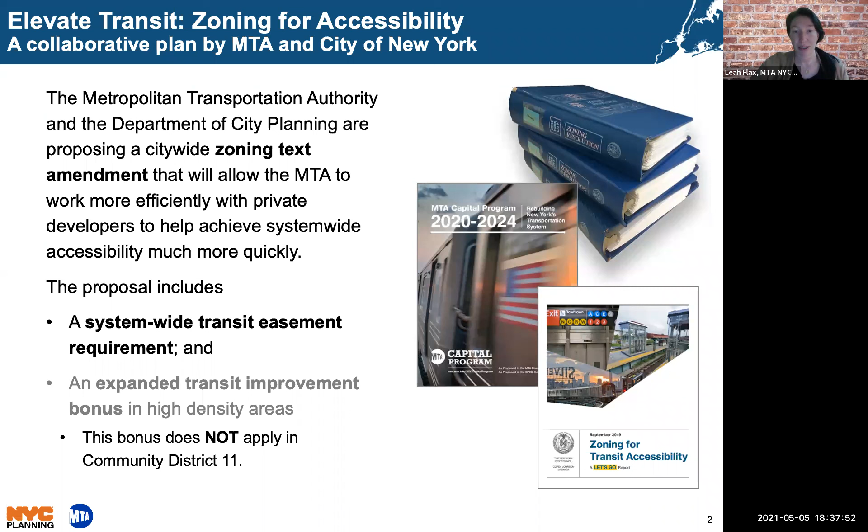So where are we right now with accessibility? Most of our subway stations were built before 1950 and didn't include accessibility. We've been making progress through our capital programs, but we still have a long way to go. Of our 493 subway and Staten Island Railway stations, 136, or about 28%, are currently accessible. And of the Long Island Railroad and Metro North stations within the 5 boroughs, 25 of 39 are accessible. When I say accessible, that can include many features to make stations accessible to and usable by individuals with disabilities. This text amendment really focuses on vertical accessibility.

We think that this text amendment can help a lot, but we've also made a historic commitment through our 2020-2024 capital program to increase accessibility. In that program, we are dedicated to making 77 more stations accessible. Once those are completed, 43% of transit stations versus the current 28% will be accessible. That represents about 60% of where our riders are, with the goal for no rider to be more than 2 stations away from an accessible station. We are absolutely committed to doing that, but this text amendment can help us move even more quickly.

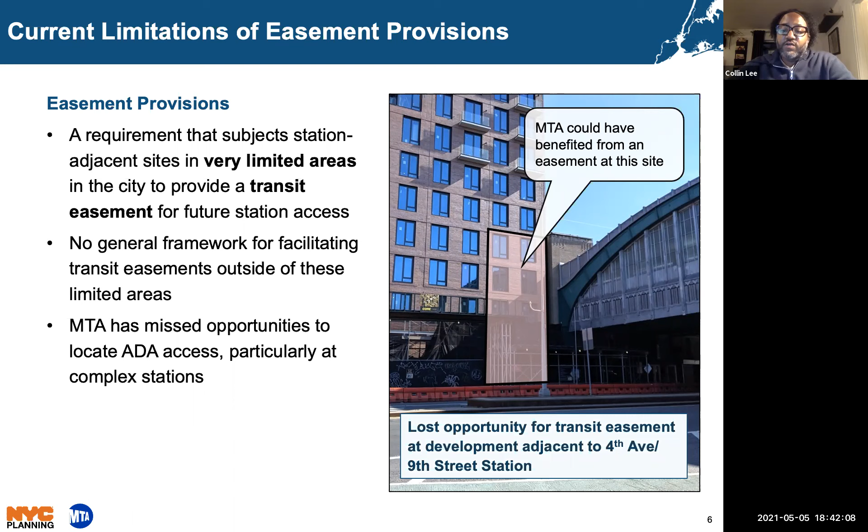However, in the zoning resolution today, these provisions have very limited coverage, and they only apply in certain areas of the city, such as along 2nd Avenue for the 2nd Avenue Subway line, and the most recent Special Inwood District. Also, the zoning resolution does not currently provide a consistent citywide approach for facilitating transit easements on development sites around transit stations. As a result of these limitations, there have been missed opportunities for the MTA to locate ADA access at optimal locations on development sites next to the station.

And to address some of these limitations of these zoning provisions, we are proposing zoning for accessibility. This proposal seeks to create more opportunities for accessibility throughout the transit system through the zoning tools available to us. One of the components of this proposal is a citywide easement requirement that will address some of these limitations.

As part of this requirement, all developments and enlargements on zoning lots within 50 feet of mass transit stations, and in applicable zoning districts, would need to file an application with the MTA and the City Planning Chairperson to determine whether an easement on a zoning lot is needed to help facilitate station access improvements in the future.

Applicable districts include residential districts that support multifamily buildings, which are generally more compatible with transit station entrances and other transit-related uses. These districts also include R5 commercial districts with a commercial overlay, R5D districts, and districts with higher density levels as well. Also, medium and high density commercial and all manufacturing districts would also be subject to this requirement, as development in some of these districts are more easily able to accommodate station entrances.

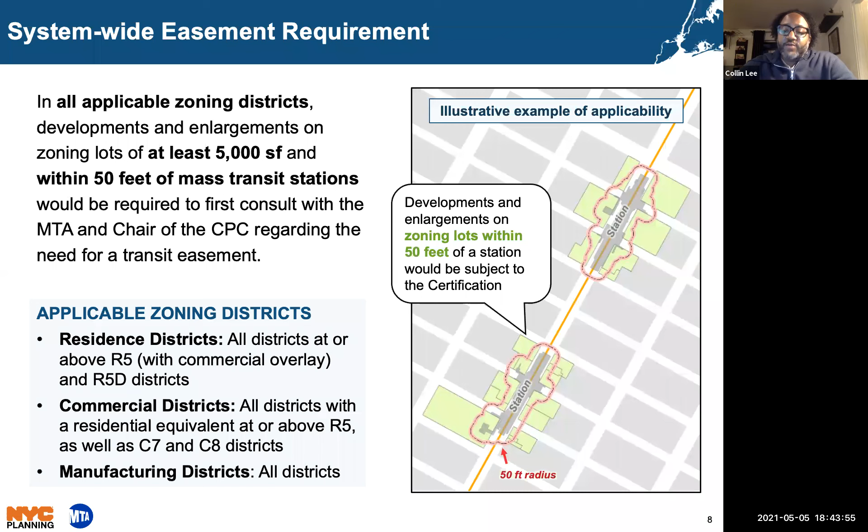While the process of obtaining a certification will be required for most sites within 50 feet of a transit station, it is anticipated that the MTA will only ask for an easement in limited places that are most optimal for future transit access around each station.

In order to facilitate easement agreements in the future, targeted relief from certain zoning limits would be provided to minimize potential challenges for construction on a site subject to the proposed requirement.

So that means basically easement areas can affect development sites in a number of ways. The easement itself takes up floor area on a site and can reduce the available floor area for the development itself.

The shape and size of the easement can also occupy a large amount of space within a development's building envelope. This not only affects the direct area that is occupied by the easement, but it also has implications for construction feasibility around that area. Also, easements can restrict available space to provide for ground floor uses and parking spaces.

And depending on the type of development, it may create compatibility issues with more sensitive uses such as apartment units and other residential uses.

Without any zoning relief, easements can limit construction of a development to its full potential, and in certain situations can result in buildings that lack any relationship with the future use of the easement.

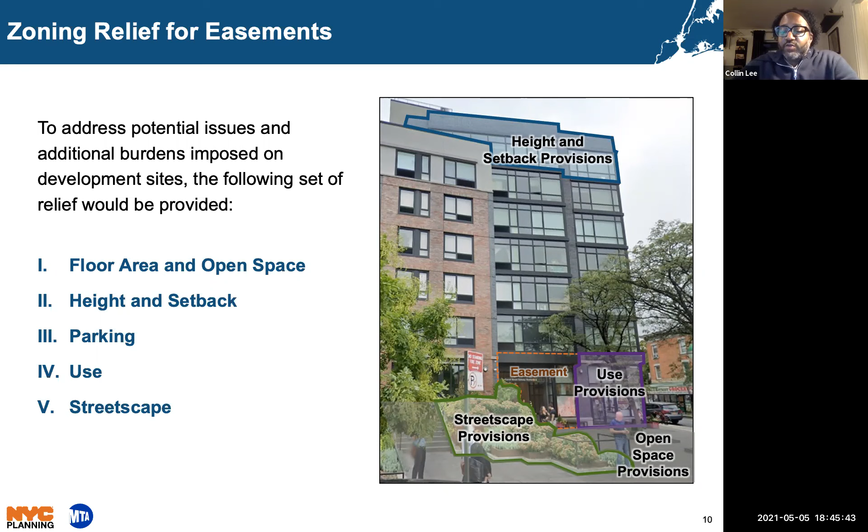If the provision of an easement makes it challenging for a development to be built, it would be much more difficult for the transit agency to acquire the easement.

And in conclusion, zoning for accessibility proposes a zoning text amendment to establish a framework for coordinating the siting and provision of the transit station improvements with new developments on adjacent sites.

As part of this framework, a required consultation process would apply to all developments and enlargements on zoning lots within 50 feet of mass transit stations and applicable zoning districts where easements are needed.

Targeted relief from certain zoning limits would be provided to such developments and enlargements in order to minimize potential challenges for construction on a site subject to the proposed requirement. Also, for sites that are below 5,000 square feet, or where conversions are proposed, the requirement would not apply.

Also, the provision of easements is voluntary on such sites, and where provided may also receive zoning relief as well. In addition to the proposed set of relief, further use, bulk, parking, loading, and streetscape modifications would be available pursuant to discretionary review and approval.

As we mentioned before, in addition to this new system-wide easement and framework, the text amendment would also include an expanded transit bonus mechanism, but this bonus mechanism would not apply in CD11 since there are no R9 and R10 zoning districts in CD11.

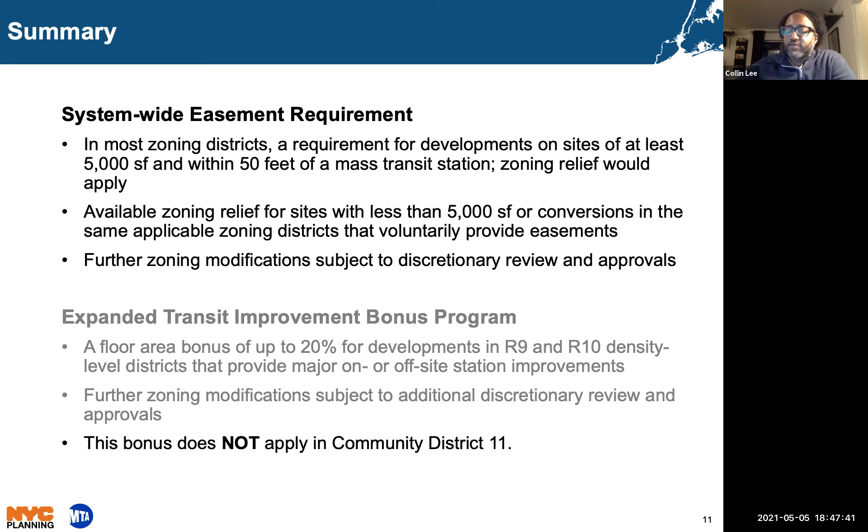The zoning for accessibility citywide text amendment has been referred out on April 5th of this year to all 59 community boards. It also went to borough boards and borough presidents, and they have 60 days to review.

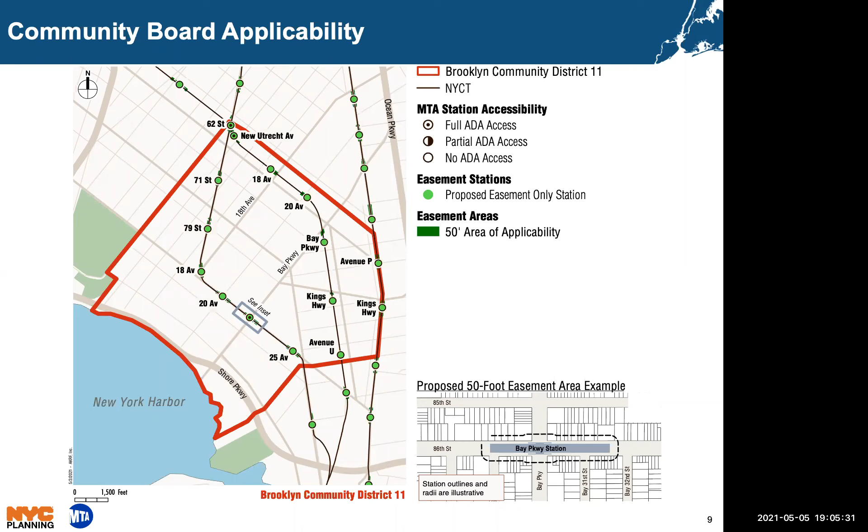So I'm assuming your question is, for that easement space, the displaced floor area, how high the allowance is to replace it in their building, right? Yes, correct. It is up to 20 feet, so up to 2 stories.

In most cases, we don't see that happening. Of course, there's the allowance for it, but the amount of floor area that would be displaced because of an easement likely would not fill 2 stories. Understood, thank you.

I have another question about when you're doing this - it will be decided by the MTA, but is it not a case by case where you can come back to us or to whichever community district to say, this is what our plan is, and this is a developer asking to build 6 stories high in front of, let's say, a landmark church. I'm thinking the old Dutch church or something. Is there something you can guarantee our district, that we have some input into what the MTA decides once we agree?

Because it's a really great thing that you're doing, I think this is wonderful. The disability - so many people need elevators - but at the same time, you don't want to take away from the neighborhood's characteristics, and we don't want to take away from people's sun and airspace. We still want to make sure it's done in a very considerate way. So that's all I'm asking.

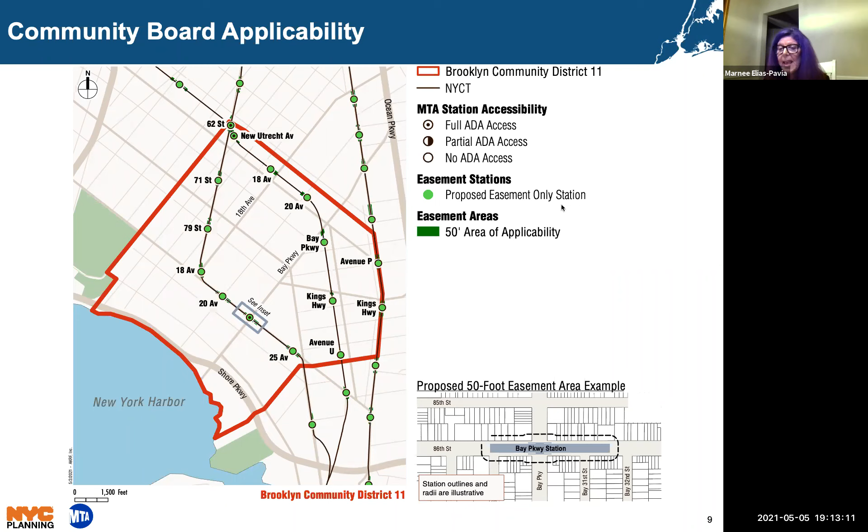I have a question - you mentioned that if a station is in the middle of the block, you would need an elevator for that. Is that correct? Potentially, it depends on the specific station, so I'm not saying there's no mid-block locations. My question is, are these elevators going to the platform or only to the station level? Within a given station, we might need one, two, three, or four elevators to make it accessible, because you have to be able to get to the station and to the platform. Some stations have a single middle platform, some have two separate bi-directional platforms, so it really depends on the location what we would need.

So, but the bottom line is the platform, the train platform will have ADA accessibility - is that correct? Yes, until you can get from the turnstiles up or down to the platform, it's not fully accessible. And how would this handle stations that only have direction in one way and you have to go to the other side of the street to get the other direction?

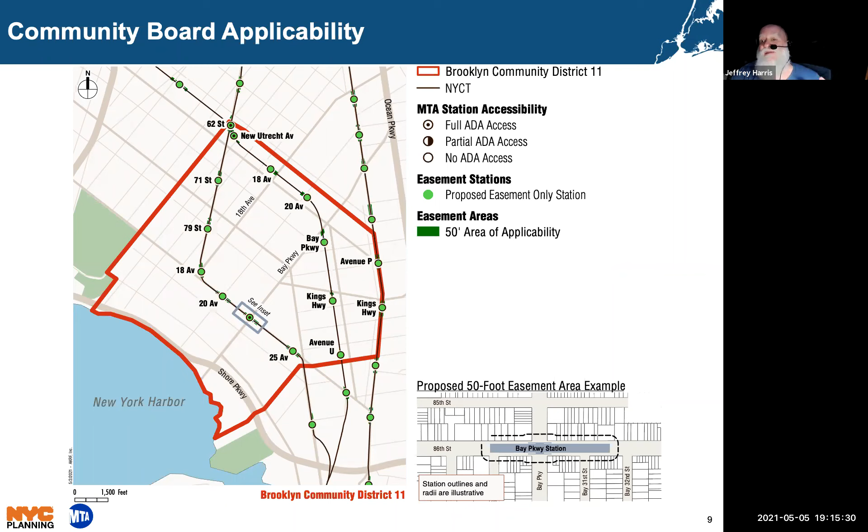And then the question is, how do you get from the street to the mezzanine? Does that require one or two elevators? No - the development's being built on, say, the southbound 4th Avenue side, and they have an elevator being built in that development, so they would have ADA accessibility. The other side, across the street, has no ADA elevator and no development. What happens to that side of the street? You would build the one that you can with the new development that's triggered by whatever they're doing.

And the station would not be considered fully ADA accessible. We have that now where some stations, you have only one line and the station is accessible, or only one direction, and then we prioritize doing the other side, but it might not be at the same time.

I have another question about the elevators, the vertical accessibility. So if the elevators are a certain size, and you have somebody maintaining them on a regular basis, would you have safety cameras to make sure it's safe inside and nothing's going on? How is it managed? Because now you're going to have a lot more all over the city, so how are you managing the safety and maintenance of these elevators, and keeping them from being vandalized?

That's happening too - the technology for elevators is improving all the time, thankfully. Now they're equipped with much better monitoring technology where we get alerts when they go out. Please still report the elevator when it's out, but we are getting alerts and can dispatch teams to address it, and we have certain standards for how quickly they have to address it. I don't know that much about our current elevator technology versus what we're hoping to have on newer elevators, so I'd have to get back to you with more details.

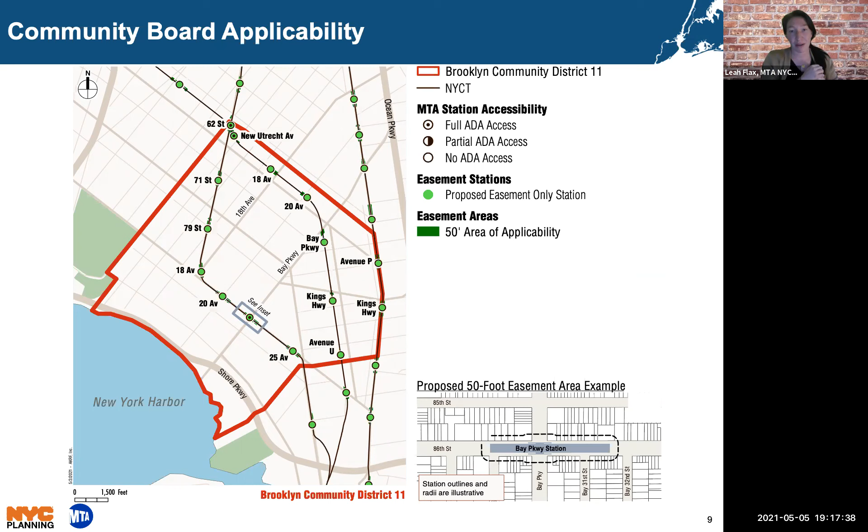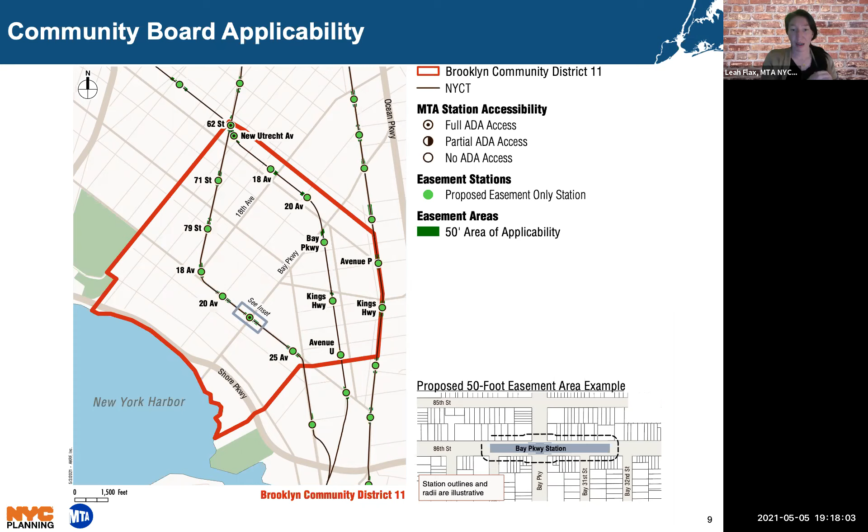I have a suggestion - wouldn't it be great if the MTA and the police department in each district could have some sort of signal if there's something going on and the elevator's out, so if a disabled person is stuck, they have some sort of communication? I don't know if you already have that, but that's something I thought of just now. There are help call buttons, just like we have our help points at the station, where you can use that to get help or information.